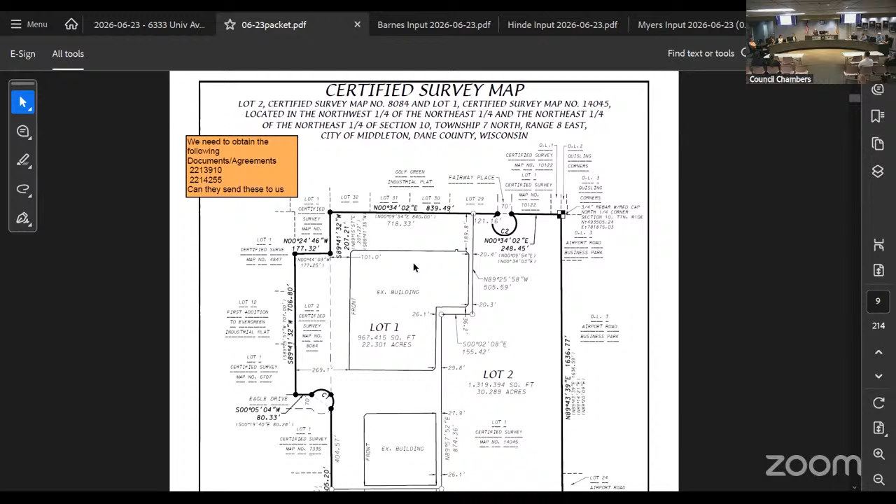So if there are no other corrections, I'll accept those minutes as drafted with that clarification. All right, we're moving on to the first agenda item. It's the certified survey map for the former American Girl campus at Fairway Place and Eagle Drive. And the recommendation from staff is approval of the CSM, subject to resolution of embedded staff comments.

This is Paulson. I'll move to accept the CSM subject to embedded staff comments. This is Shaw, I'll second that. All right, we have a motion and a second. Any comments?

Commissioner Paulson: What is the current zoning, and would these two new parcels conform to the existing zoning? Or is it a GDP? It's an SIP, and yes, it would conform.

Anything else? All right, seeing no other comments or questions, all those in favor of approving the CSM subject to resolution of embedded staff comments signify by saying aye. Aye. Any opposed? The ayes have it.

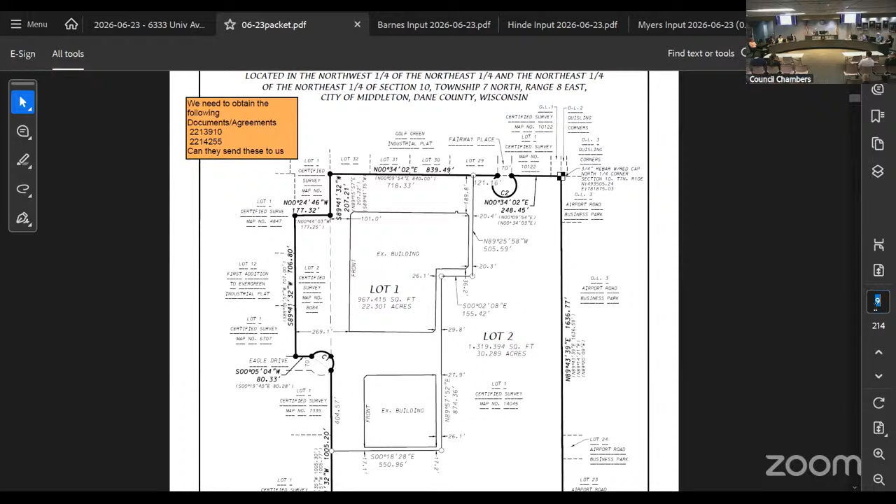All right, we're going to skip item 2 for now, just because our staff person is playing double duty. We'll go to item number 3, which is recommendation for determination of need for sidewalk installation along portion of north side of Lisa Lane. And the recommendation is that council approve resolution 2026-24 determining the need for sidewalk installation along the north side of Lisa Lane.

Is there a motion? This is Shaw. I'll make a motion to approve the resolution and recommend the common council move forward with installing sidewalks on the north side of Lisa Lane. Is there a second? This is Bruce, I'll second. All right, we have a motion and a second. Any discussion?

Commissioner Paulson: Can staff just, when we determine that there's a need, then that triggers a process different than what's under our purview? Yes. First of all, I just wanted to quickly introduce our planning intern, summer intern Michael McPhee, who wrote the staff report for this item. We were slammed last week, so we don't normally have a planning intern write a staff report, but when you have a rock star, he filled in for that.

So it determines the need, then at that point the common council will make that same determination and adopt the resolution. And then we reach out to the property owners and discuss with them whether they would prefer to hire their own contractor to do the work to meet city standards, or if they would like to go into the sidewalk replacement program that the city does annually. I think it might be too late for them to go into the replacement program this year because we have already bid and accepted it.

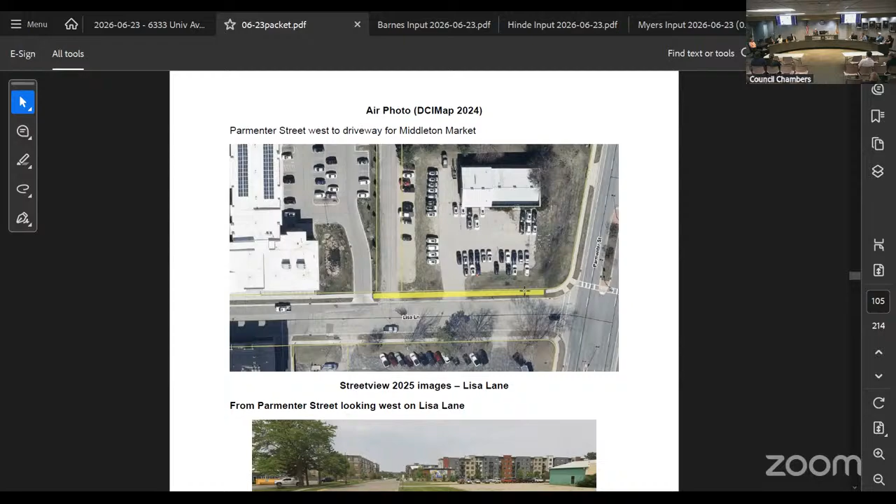One question I had is, do we need to or want to specify in the resolution what - I guess in theory, if it said along the north side of Lisa Lane, that's pretty complete, but since it says along a portion of it, I wonder if we should say from Parmenter Street to 7620 Lisa Lane to specify that in the resolved clause.

I would suggest that amendment. Actually, I'll move to amend the resolution to add that to the resolved clause. I'll second the amendment. All right.

Staff, do you see anything about that change that needs further discussion or tweaking? Okay, all those in favor, or any discussion from the commissioners? Nope. All those in favor of the amendment to add from Parmenter Street to 7620 Lisa Lane to the resolved clause in resolution 2026-24, signify by saying aye. Aye. Aye. Any opposed? All right, the ayes have it.

Any more discussion on the main motion as amended? If not, all those in favor of recommending that Common Council approve the amended resolution 2026-24, determining the need for sidewalk installation along the north side of Lisa Lane from Parmenter Street to 7620 Lisa Lane, signify by saying aye. Aye. Aye. Any opposed? The ayes have it.

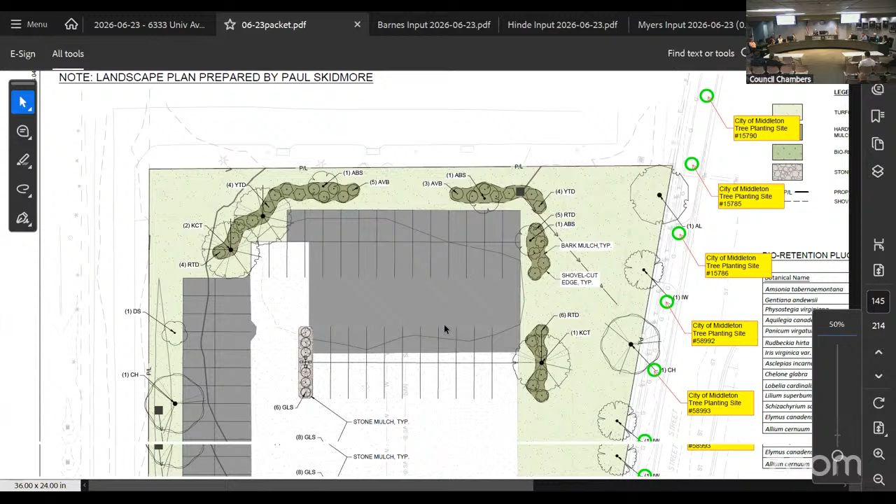Any discussion? Yeah, I wanted to add, I understand that we're not putting curb around the outside of the parking lot, and the city engineer was okay with that. I have some concern about the 2 tree islands or landscape islands that they have, just in terms of protecting the plantings that are there. They're not large areas, and it seems to me that if we want that landscaping to survive, we need some sort of protection around those 2 tree islands. You're talking about these ones at the end - these tree lines? Yeah, right.

I don't necessarily think that it has to be a concrete curb. It could be a railroad tie or some other mechanism.

Is it a matter of protecting them from cars, or is it a matter of getting groundwater towards the tree roots? Or both? What I see happening is the snow plows and cars driving over the edges of them. I'll probably be more concerned with the snow plows, considering who's going to be parking there, but yeah, I'd also be concerned about tree roots.

And is that one tree existing? I don't think so. Okay, feel free to come up. Please speak in the microphone and introduce yourself.

Good evening, Matt Dunn with Sullivan Design Build here on behalf of Simbrick. Yeah, I can confirm that tree does not currently exist there.

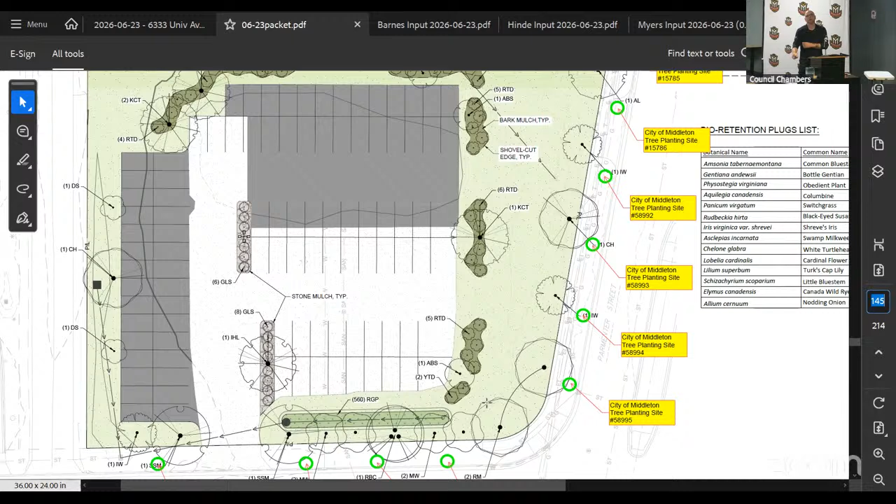I don't know that snow plowing would center in on those islands. To be effective for our customer to remove snow from the lot in the winter months, I imagine it would be pushed out away from the center of the lot.

I do appreciate everybody's work on this and the city engineer's response. Do you have any more questions I can answer? Any comments?

I guess this is more of a process question for staff. If our site plan requires someone to install landscaping and then the landscaping is killed because of snow plows, do we reinforce that requirement that they have to reinstall it, or is it just once and done, it's installed and it's check the box?

Yeah, so we don't do this often, checking up to see if they've planted everything, but there have been a couple instances where we've noticed pretty egregious plantings have died, and we've gone back to require them.

It also came to our attention because they were trying to make some improvements, so as part of that they came to Plan Commission and we required them to redo their landscaping. So it doesn't happen often, but usually it's when we get a complaint or something, we'll check in on that.

So that holds true also for the bioswale, if it turned out that wasn't enough for the drainage? Yeah, so the bioswale, they'll have to go through a stormwater management plan, reviewed by our engineering staff, and they'll inspect it and all of that as well. So once it's built out, we'll be sure it's inspected and we'll handle the flow of everything that goes in there.

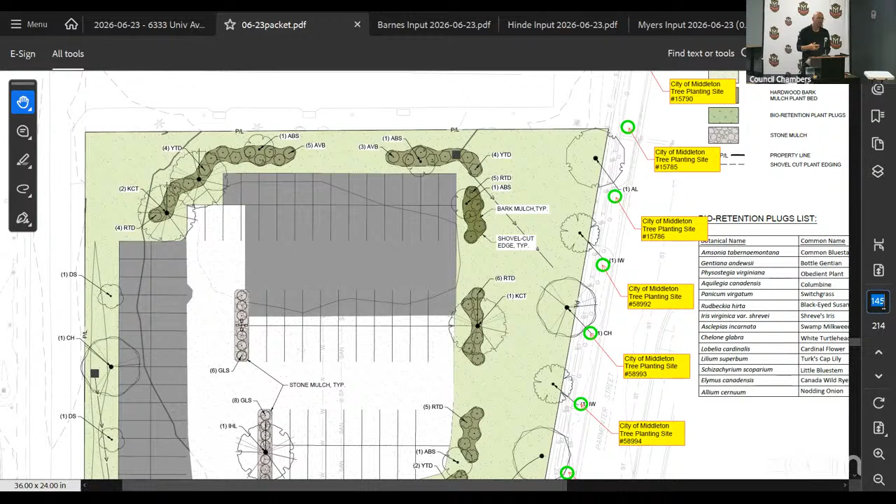Yeah, and there's a substantial investment from our customer in the landscaping itself, with the soil, the bioretention pond, and all the plantings. And our landscapers can be held to their warranty of workmanship and the plantings themselves.

Thank you. I wonder, since the landscaping requirement has come up twice in this meeting and we have a lot of people in attendance, would one of the staff like to explain what our requirement is with regard to native plants?

Sure, yeah. So very generally, we require certain landscaping depending on how much impervious surface there is, what is being built, if it's commercial next to single family or residential, we require extra landscaping in between to kind of buffer the two uses.

And then there are point requirements that get tabulated, they have to reach a certain amount of points to fit our city's landscaping requirements. At least 75% of those are also required to be native plantings, things found in Wisconsin or the northern US area. We have a list in our ordinance for at least a baseline of what is considered native plantings, and that also helps a lot with stormwater and all of those things as well.

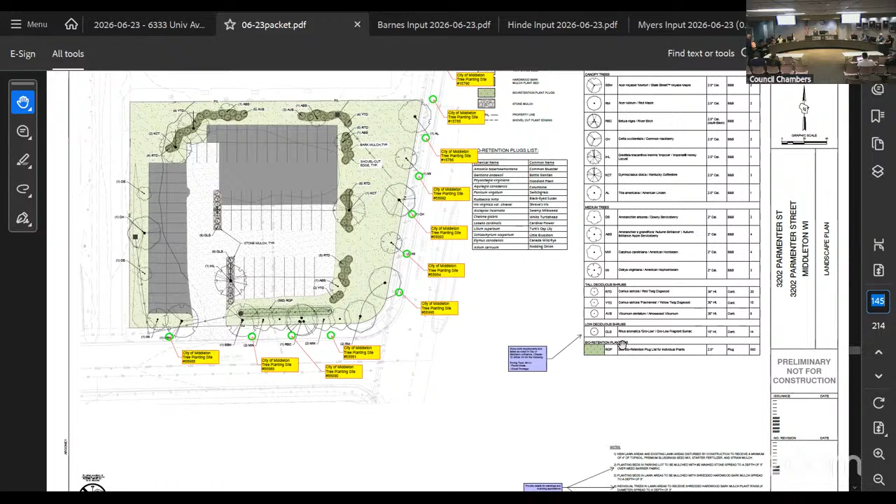Okay, so we have a motion and a second to approve the site plan review contingent upon these 7 contingencies showing on the screen. All those in favor of that motion signify by saying aye. Aye. Any opposed? The ayes have it.

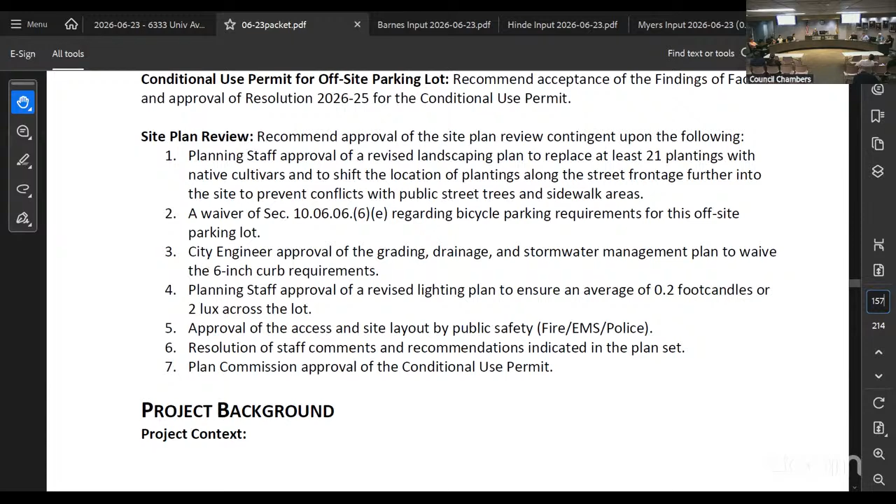Okay, moving on to item number 6, site plan review for multifamily residential development at 6333 University Avenue.

We have some public comment slips, so at the chair's discretion, I'm going to allow public comments tonight because I was unable to attend the neighborhood meeting. I did not know about it, but as it turns out, I would have been unavailable anyway because I had a wedding to attend.

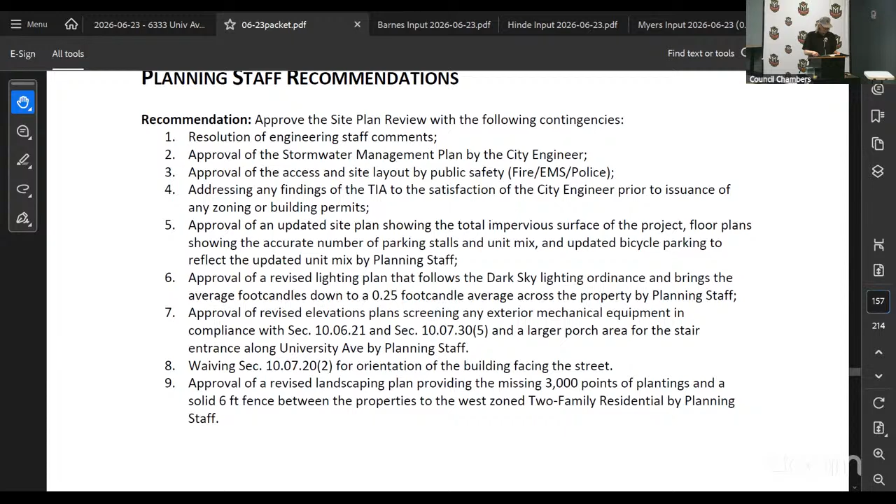I'm concerned that my property values will go down with this. If I try to sell my house, or decide I can't live there at this point because of this, I don't know if I'll be able to get as much money for my house. That concerns me.

I was under the understanding that planning concepts with apartment buildings were kind of to cluster them in certain places. Seems to me we've gone down a line here where we're just building buildings along University Avenue. There'll be kind of a canyon coming into Middleton from the Madison area. I'm concerned about turning Middleton into a commuter city where we just have people living here, but there's no increased jobs or amenities for these people living in these particular apartment buildings.

Very concerned about traffic pressures. I'm not sure how people will be getting onto University Avenue from this project and the project right across the street. Seems to me both of them will have times of the day where people are trying to make left-hand turns that will cause a great deal of congestion and maybe dangerous situations.

I don't know if there's any kind of green impact with this particular project. I don't know if there's going to be trees planted, any kind of park type areas for these people to spend time other than just in pavement and in their particular apartments.

Concerned about the increased lighting. One of the things I enjoy about my backyard so much is it's dark, and at night I can see stars, which I think will go away at that point. Concerned about the cost of mitigation to protect my backyard and keep it more private — assume that's going to cost me a fair amount of money.

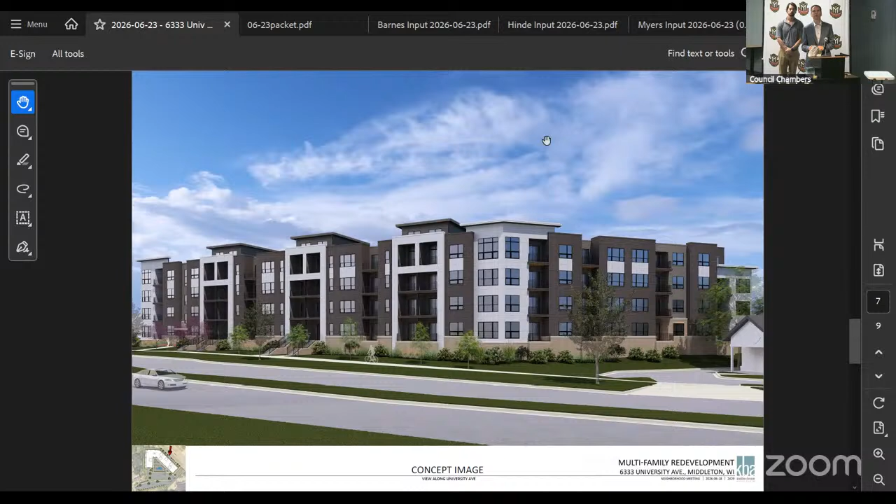This is a view along University Avenue. So this is as you're coming up University Avenue, what you would see for how the building presents. We do have the opportunity for the residents, for some of the residents that live along that area, to have direct access down to the sidewalk to really help engage the building to the street and to the pedestrian feel. And we do have a common staircase entry, which is on the left-hand side of this image shown here. And the building does return back.

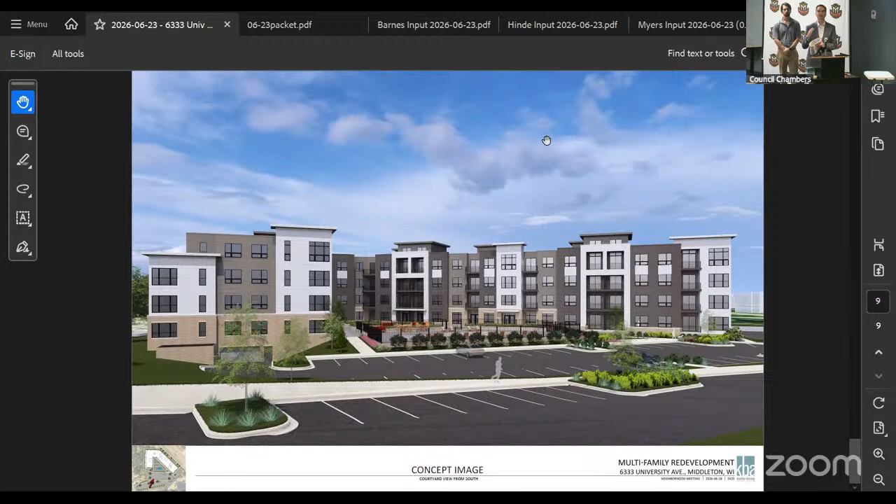And this is a view inside the courtyard area as you're coming around to that parking area, which will then lead you down. And the next slide will show you how you can access down into the underground parking, again, utilizing the topography of the site. And then we will do landscaping around that outdoor plaza area as well.

And then Colin can speak to the overall timeline of the project. So currently we have leases in place for most of the units in that building. The last lease goes through June of 2031. We've been in contact with the commercial tenants about their current leases. We're open to extending through that 2031 timeline, which our last lease is through. With it being later in the season, we may be able to break ground late 2031 or early 2032. We are stepping the building back about 10 feet from its current location.

One of the topics brought up in the conditions was landscaping. I talked with our landscape architects today about increased plant points. We're going to utilize, like in our previous buildings, a lot of planters along the plaza area. That'll add greenery to that center area, as well as landscaping around the new driveway up to Elmwood Street.

Are there any other questions on this presentation or current leases or anything like that? I'll go to the commissioners.

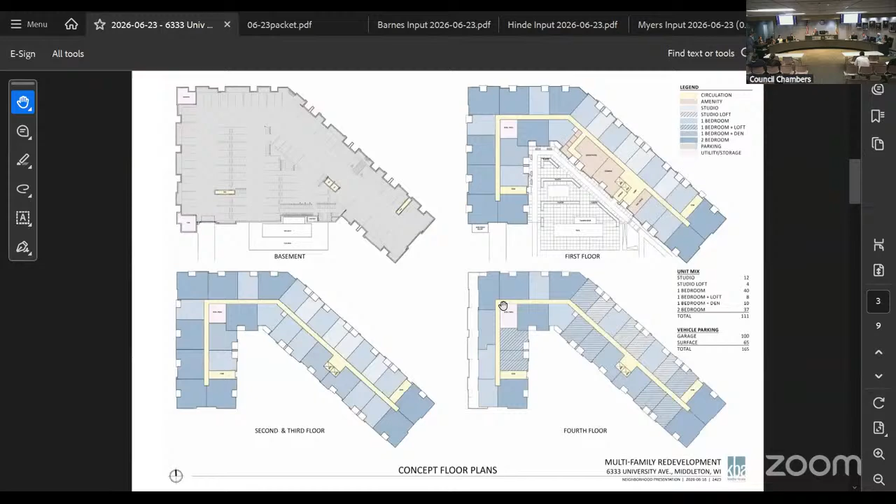Are there any recreational spaces on the roof, like a sun deck or green space? On the very top of the building, no, but the units facing west have an opportunity where their balcony is the roof surface they can step out onto, because we set the building back an additional 10 to 12 feet.

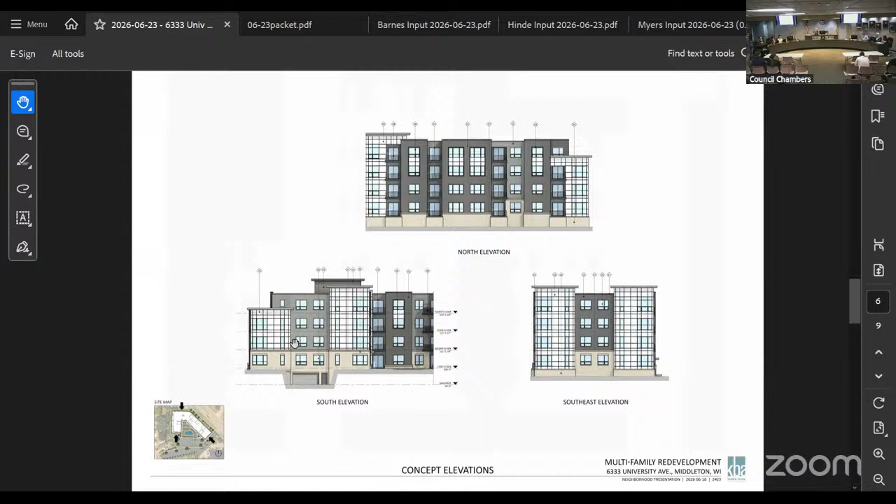When you were doing the design, the pool seems to face the parking and more parking. If I were living there, I'd like to be a little more secluded using a pool. It seems like you have an opportunity to reorient the building with the western leg blocking some of the pool and giving relief to the neighbors, so they wouldn't have a building against them but rather a pool, which I think they'd appreciate. I wouldn't want a 4-story building even with a setback right against my lot line, so I understand their concerns. Maybe this could have been looked at differently. I don't know what the constraints were when designing this.

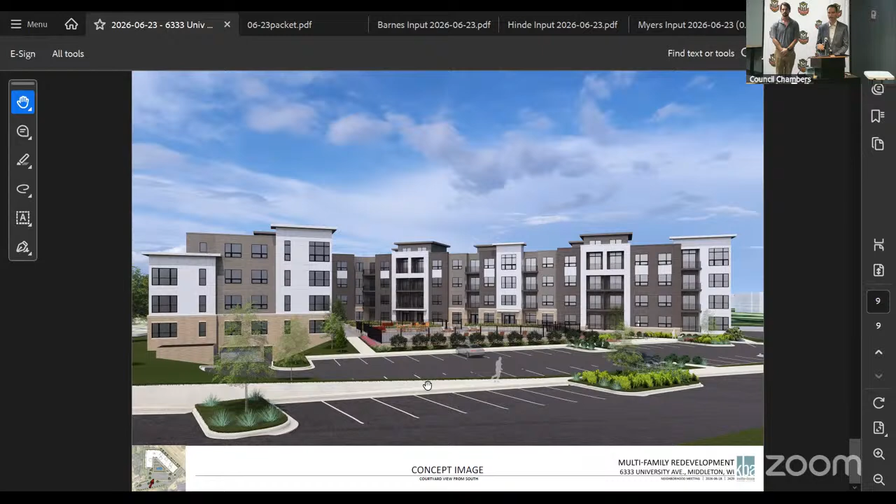Well, we studied it in various scenarios. Our main focus was to help ensure the pool would have ample sunlight. We do intend to do extensive landscaping along the southern edge to provide that buffer. It's elevated above the existing grade as well, since the grade drops down to get into the basement level, so it'll be elevated above parking, meaning there won't be direct headlights. There will be landscaping screening as well. This proved to be the most efficient layout for placement of the building and the amenities we wanted to provide for residents.

Commissioner Paulson: interrupt me anytime, I probably have 17 questions. While we're talking about the pool, do we have a noise or hours of operation ordinance, given its proximity to residential properties? Yeah, I believe we have a nuisance ordinance generally across the city, and things like construction and noise, amplified sound, starting at 7 AM and ending at I believe 10 PM.

Could we? I was just seeing whether we needed to put a condition in the plan about the hours.

I want to ask more about the step back on the west side. Daphne, can you remind us what our ordinance says when a commercial district abuts residential? Yeah, for any zoning district, like a commercial district abutting a residential district, we only allow up to 3 stories at that setback, and anything higher needs to be stepped back. So what you see on screen, the building is pushed back further, at basically a 45-degree angle. So however tall the building is, it has to be pushed back that same amount — if it's 12 feet taller, it has to be pushed back 12 feet.

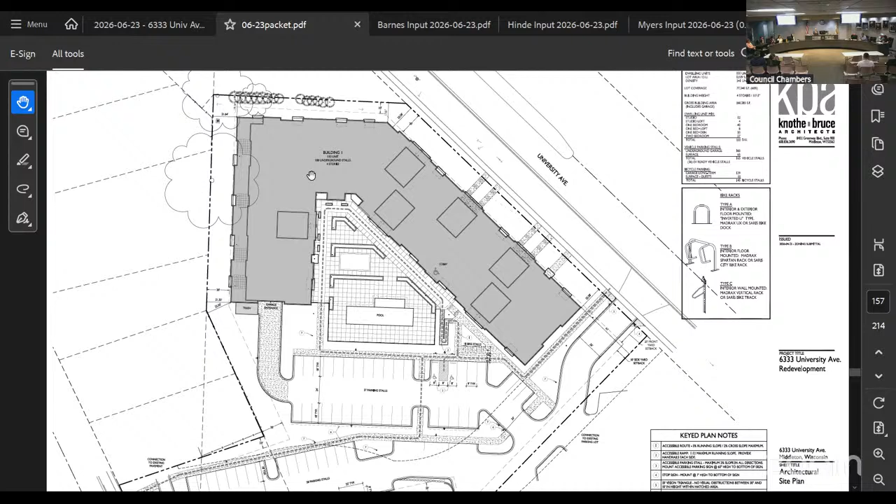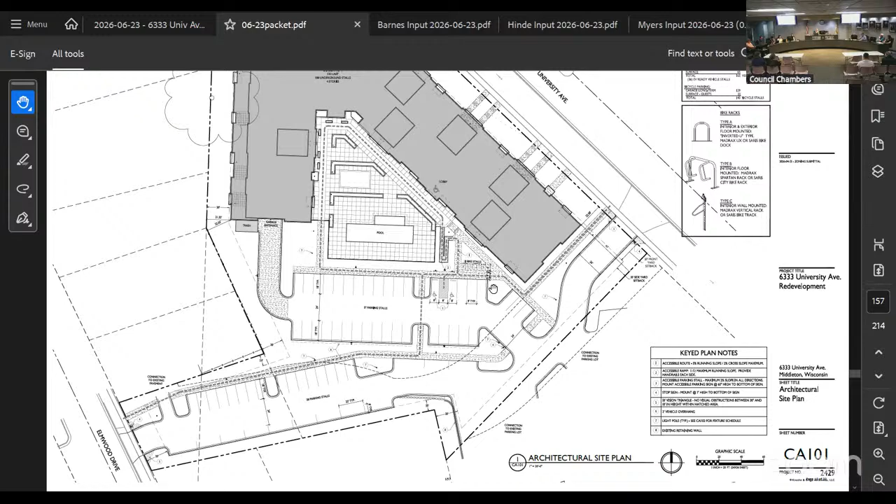Commissioner Paulson, relative to traffic, the cut through on the south side currently exists, but that's not a street, that's just a private drive. People drive through there anyway and the owners are okay with it. So relative to what some of us, and some of the neighbors, were thinking, if you took that west end chunk, the part you know I'm talking about, and flipped it over next to Wolf Kubley and blocked off that access, then you could retain the northwest entrance. Would that negatively impact the cut through on the south side?

I'm sure you looked at it, did you even do a skim? So that the building would start, I don't know how much you'd have to cut off and then put along, where Daphne's moving the finger.

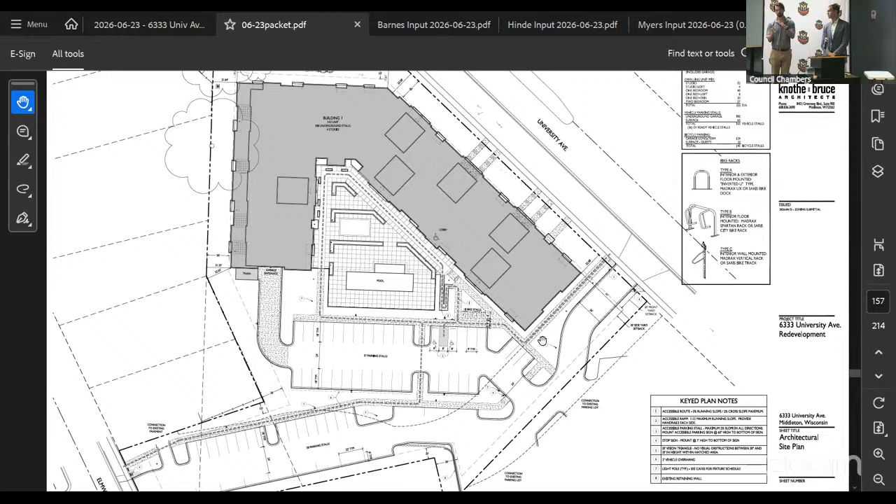So right there, we actually have an easement with Wolf Kubley for that area. That's a shared parking lot, shared drive, subject to an easement. Just to clarify, is the driveway shared or the parking lot shared? The parking lot - there's an easement between us and the Wolf Kubley property owners for that pull-in area, kind of that whole area is split between the two of us.

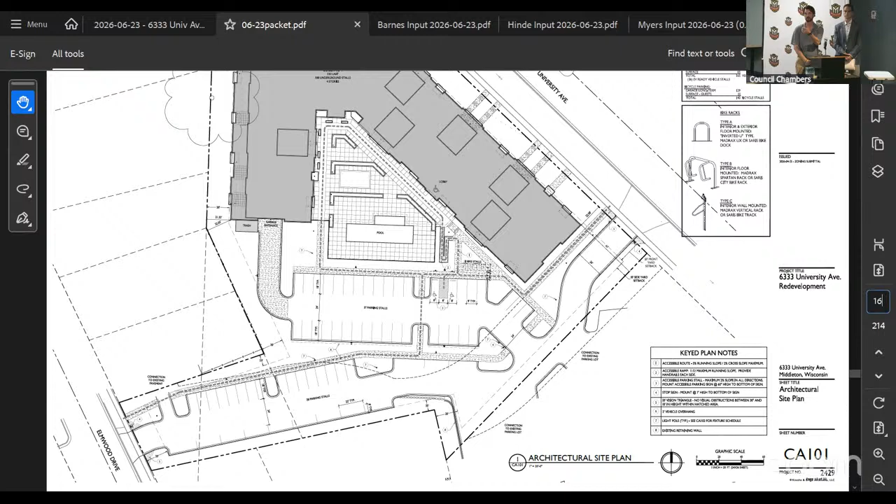Yeah, right there, that big. But the new building would still be on top of that though, right? No, no, no. Oh okay, I believe it was in the wrong spot - oh okay, I accidentally dragged it, okay, but that's another thing that runs through that property, that easement area. The reason I ask is, I understand the neighbor's concern about why wasn't the building flipped the other way, and it's both the infrastructure and the easement that really makes it so you can't do it. Exactly. Well, I mean you could, it would be a challenge.

Go ahead, Ray. Mr. Burrow, if you could - we're listening, we're hearing some comments from the neighbors regarding reorientation of that, what I'll just call the most western leg.

Is there an opportunity for all or a portion of that leg to be reoriented or relocated to the southeast section of the site and still get access to the parking? Maybe the pool becomes, instead of just directly south, a little bit southwest oriented, and the courtyard would orient more southwest. Do you see that as an opportunity at all?

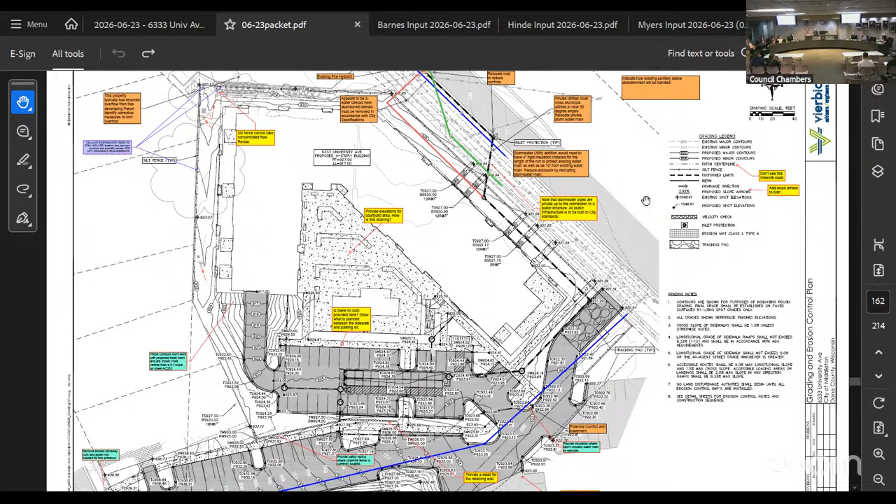Relative to the retail question, again, our ordinance cannot require it, right? Because that was a decision we went over and over during the comprehensive plan and the rezoning, whether to require mid-block retail, particularly on this mixed-use avenue zoning district, just because of all the cut-in, cut-out traffic access. I think the city's policy was not to require it mid-block, based on the experience of the city of Madison, which has a lot of mid-block first floor commercial sitting empty that was required, so it's not really as much a walkable thing on University Avenue, it's really more a drivable arterial road.

Even down University into Madison you can see there's still a lot of empty retail. It's a little more difficult for retail to survive in areas where there isn't, and the reason the strip mall works is because there are still multiple tenants. So if there's only maybe one tenant in a mid-block, it's still pretty difficult to be viable.

So do we know where those tenants are gonna go? Like you said, you've got leases through 2031, so this isn't gonna start till late 2031, early 2032. Where are those businesses going to go?

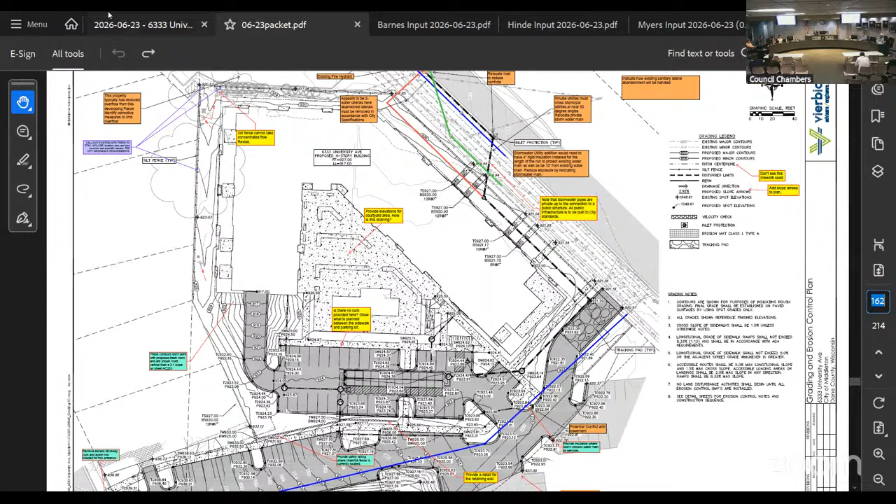Commissioner Paulson? Daphne, in the staff comments, there was some mention of a crosswalk or a crossway at, I forget the name of the street just immediately south. Do you remember those comments in the staff report? Are you talking about... let me pull it up. Gateway, yeah, the one across where 6300 is along Gateway.

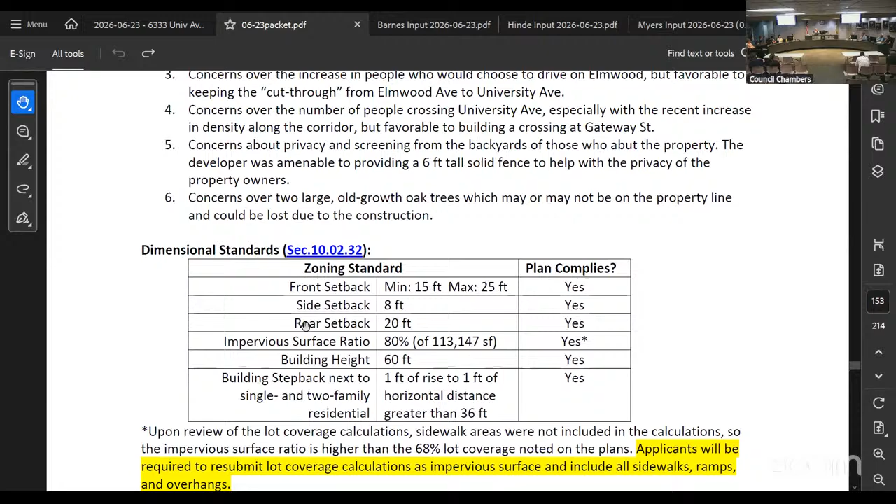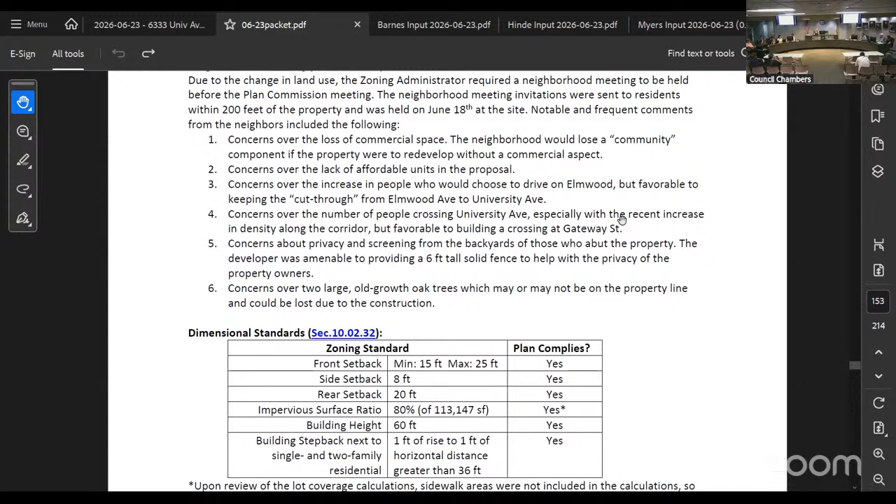The staff comments identified a need for something there, but there's already a painted crosswalk, right? I'm not sure if there's one favorable to building a crossing at Gateway Street. There's a painted crosswalk on the south, over by the Wolf Coop. And again, what we learned from the Parmenter discussion is we wouldn't really think it's safe for a mid-block crosswalk on a high capacity arterial like University Avenue.

University Avenue is definitely one we're probably going to be looking at more intensely because we have a lot of these mid-block crossings without any signals or even RRFBs. That is definitely something our Public Works Department is going to be working on in the next couple years. I can't say if this project will trigger anything, but as part of their traffic impact, they will be required to mitigate.

It's like the left in, left out, or right in, right out kind of situations, they will need to be able to address those. Because you could imagine that with this many units, and possibly others given the corridor plan and the zoning, and then the one across the street, it might warrant an additional stoplight somewhere along the way.

So, okay, I think Randy has some comments. Go ahead, Commissioner Bruce. Well, first of all, I just wanted to offer my support for redevelopment of the site. It is a neighborhood resource now as a commercial facility, but its redevelopment really sits quite well with our long-term comprehensive plan. We should be excited about the ability to provide additional housing along this corridor where we can use, at least in the future, rapid transit. So I'm very supportive of the use.

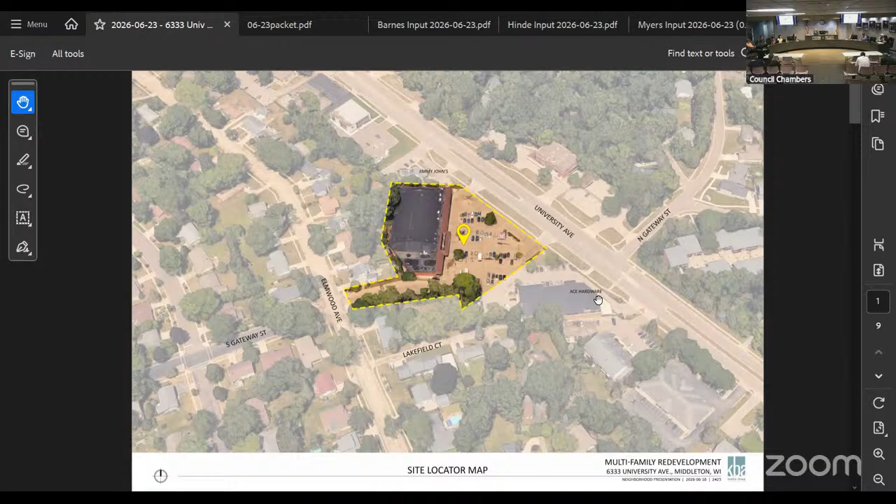When I first looked at the site plan, I was not struck with that concern about the proximity to the western, the west property line, because of the building step back. That fits with both the University Avenue corridor plan and the zoning. I'm not sure we can even require a change there if it meets our zoning. I would maybe ask the developer and design team to take a look and see if there's an option that would help mitigate some of the impact of the building on that site, but I'm not sure what we can do to require it if it meets all our zoning requirements.

The couple of comments I had about the design: one is the length of the building along University Avenue. We have a 250-foot limit. If you go back to that site plan, Daphne, I think in the staff report you talk about 240 feet, tracing along with the cursor. My concern is from University Avenue, if you're looking at the building you see that facade, but you also see this facade as it starts to bend back, so it would exceed the 250 feet if you were to look at it all in one plane.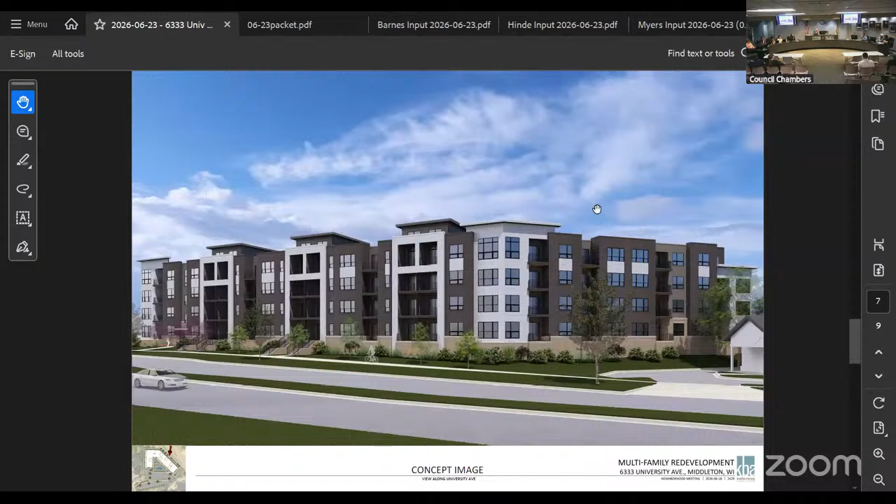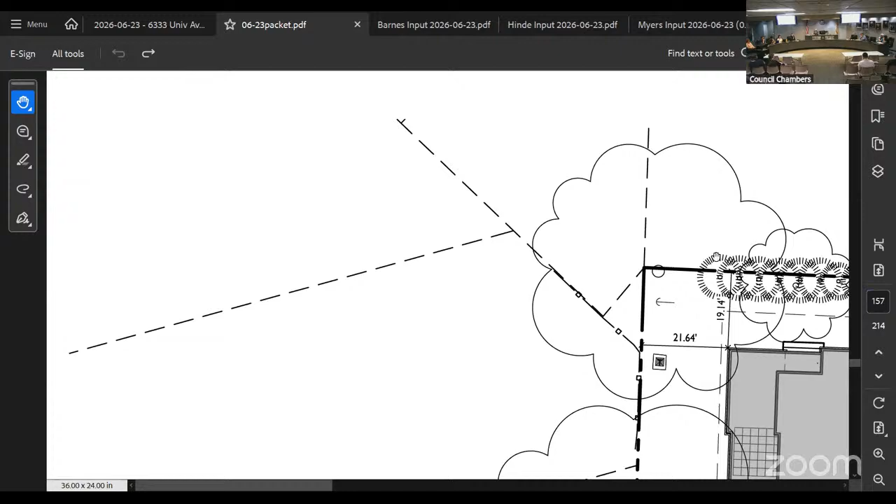I also think we ought to require a tree protection plan for the trees along the neighboring properties, on the west side and even the south side, where we've got the neighbor concerned about the pavement. I don't think if the pavement stays basically where it's at there's going to be much impact or concern there, but I think a tree protection plan could address what needs to happen there as well.

The last comment I'd make, which Daphne had put in her report, is about the stairway exit onto University Avenue having a more significant entry feature — a porch or some other element. If we can get that to read as a more primary entrance, and include electronic access and security access, so that people walking across the street — there could be some pedestrian traffic in this location given the number of housing units right there. Rather than make them walk all the way around the building, it would be good to have a pedestrian access point there.

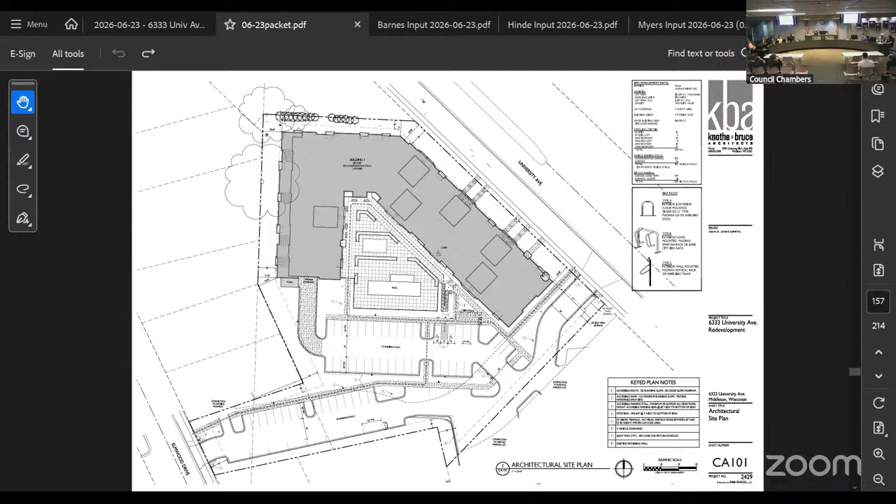Can I just clarify? Are those stairway entrances only to that specific unit, not to the common area of the building, or are they? The one to the south, right where her mouse is, is a public access emergency egress stair which could serve as a public access entry point. It's down at mid-level between the basement and first floor — we could have an opportunity for entry there. The four to the north are directly into private patios.

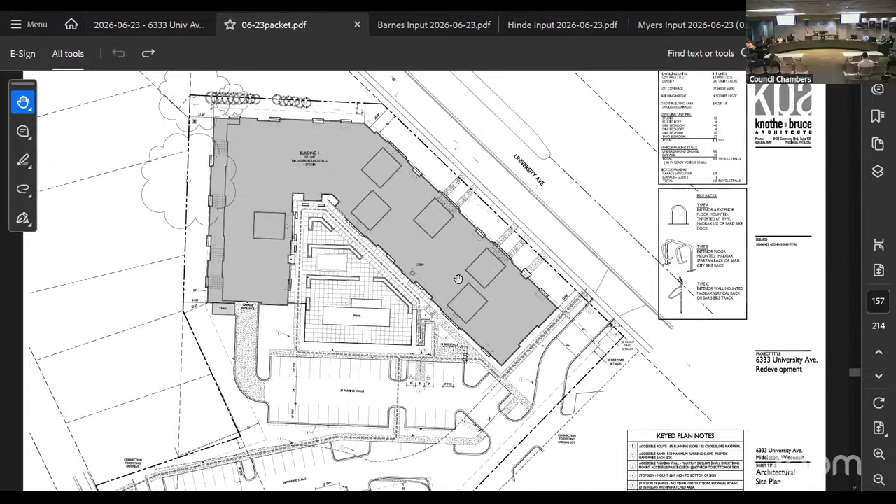So there's no common hallway on the first floor you could connect to? Well, there is — could you get to the first floor plan? Kevin, can you describe how that would work? Just above that two-bedroom unit, there's an exit stair with a clear path to the corridor inside the building. So if anybody were buzzed in at that entry point, they could come into the building and get access to the interior of the entire building.

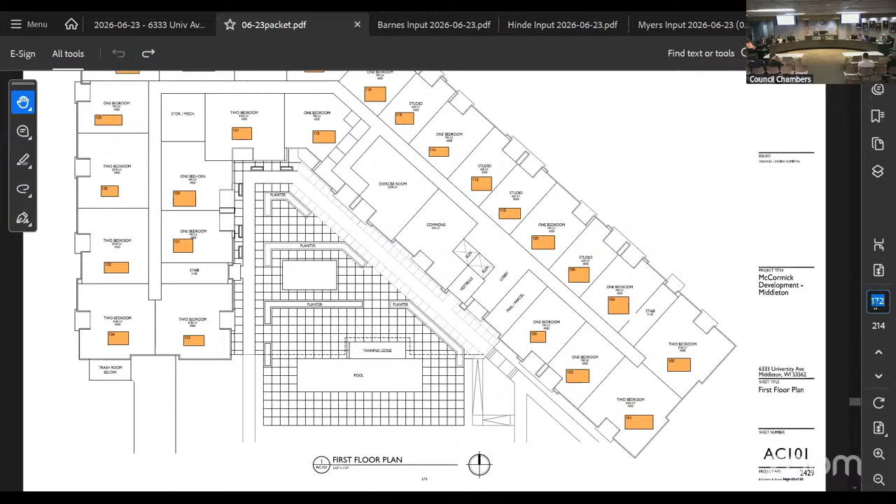Otherwise the entrance is by the... yeah, correct. And the corridor design guidelines want the entrances toward the street, right? So Randy, you're suggesting changing the staff comment — is there a staff comment on this particular point? There was a staff comment. Okay, Daphne, can you help us out there?

Yeah, so that's number 7. Larger porch area for the stair. I think the only thing I would do is add that the larger porch area and entryway read as a primary entrance.

Do you want to say consistent with the University Avenue plan? Yeah, consistent with the plan, University Avenue plan, and to include electronic and security access.

Would that need to be ADA as well? No, it does not. Okay, what about signage right there to make it look more like a front entrance? Could we do a monument sign there to tie that in? Yeah, you're allowed to have one monument sign on the property. You could also have on-building signage as well.

Yeah, because otherwise the architecture that says this is a stairway is like, oh, no it's not really, it's just to a private entrance, it's not to the building itself. Yeah, that's a good call, Commissioner Bruce.

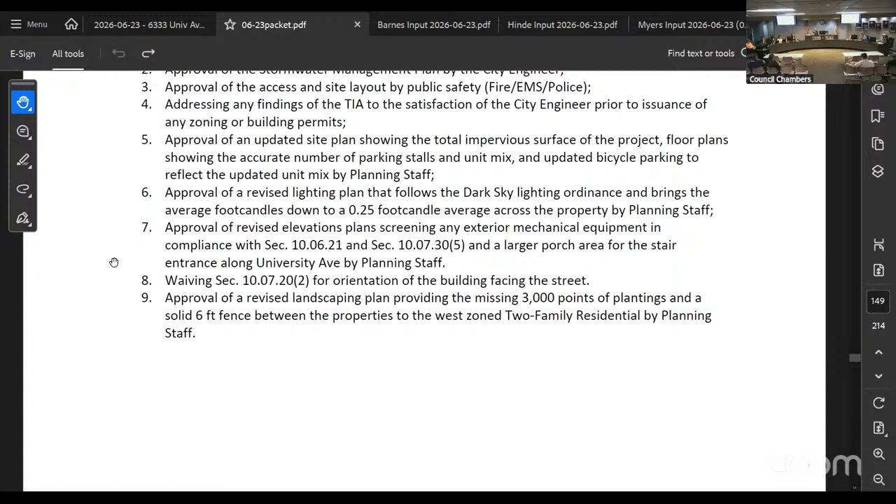And the 6 foot fence, I'm looking at point 9, who maintains that over time? A 6 foot wood fence isn't... We've got this on some of our other buildings that would be on our side. We would do a long-lasting, more of a Trex material fencing, and we would be able to maintain that with our landscaping. So you would maintain the landscaping on your side.

I'm thinking about the neighbors where all of a sudden it's just a 6-foot fence and now they're kind of boxed in. The point of the 6-foot fence is to offer them privacy. Is there any other more attractive green space option so they don't just feel like a giant wall went up behind them?

Are you saying like put trees? Like arborvitae or some bush? On our side, correct? Yeah, I'm just thinking that if it was my house and all of a sudden I had all this open space and now I've got a 6-foot wall, and behind that wall is a bunch of apartments, that might not be the best view. I think I would rather have a row of plants myself.

I don't know if that's true for the owners, but was anything else discussed on how to provide some privacy? If you don't reorient it, if there has to be a building there, is there anything we can do to soften it, make it more attractive, more park-like? That was another question - are there any green spaces for people to hang out?

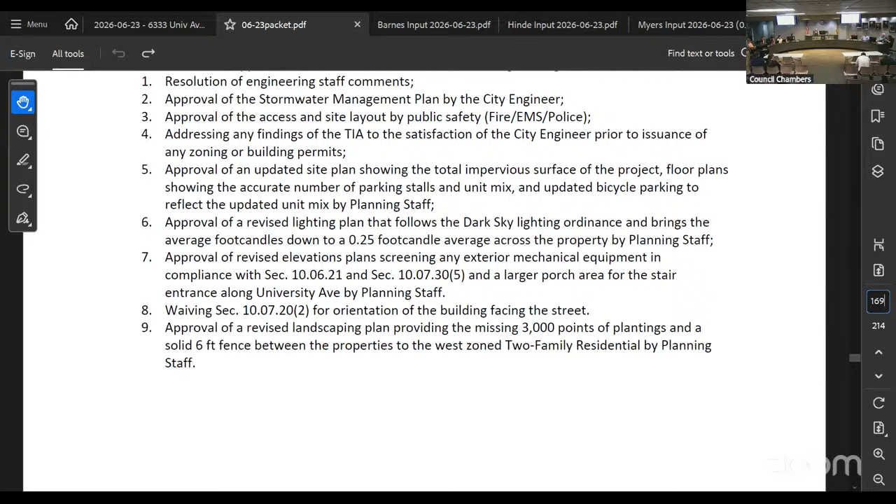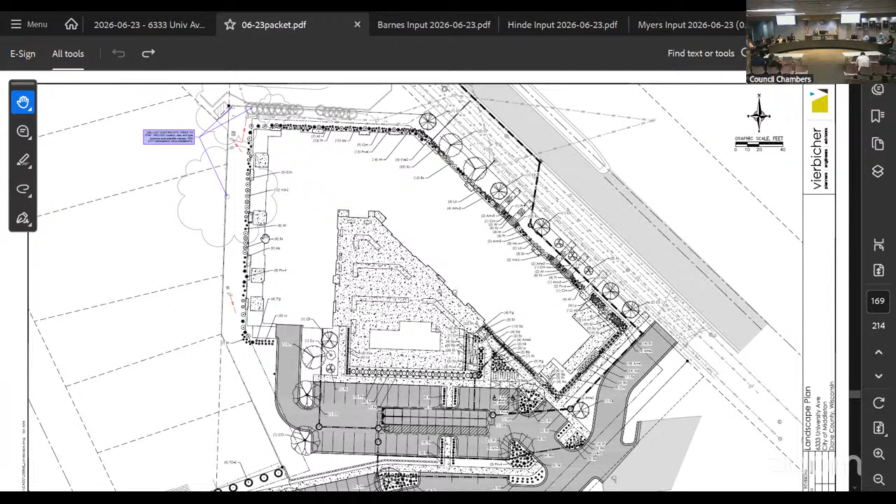If there was 20 feet there, what's happening with that 20 feet between the property and the building? You mean on the west side? Yeah, the 20 feet between the fence and the building. So if you put up a fence, now you just have an alleyway. So the fence came from our neighborhood discussion.

We can put arborvitaes back there, more landscaping on our side so that we can maintain them. The fence was brought up from that neighborhood meeting, and that was kind of what we had talked about there.

So part of the landscaping point, point 9, was they are missing quite a bit of landscaping, and part of it is a requirement as part of the buffer yard. We also have a requirement for a 44-inch picket fence between Mixed Use Avenue and residential, and so they've decided to go with a 6-foot privacy fence after meeting with some of those neighbors.

And so that 20 feet is considered a buffer yard. So it's generally not considered something residents are supposed to be regularly accessing for recreation, because it should be heavily planted. Yes, they would be required additional plantings in that area. I believe they have some balcony spaces back there, but nothing for people walking around. I'm not sure if they would have any - because it's also parking, there aren't any first floor patios or anything either, it's kind of like a brick wall back there.

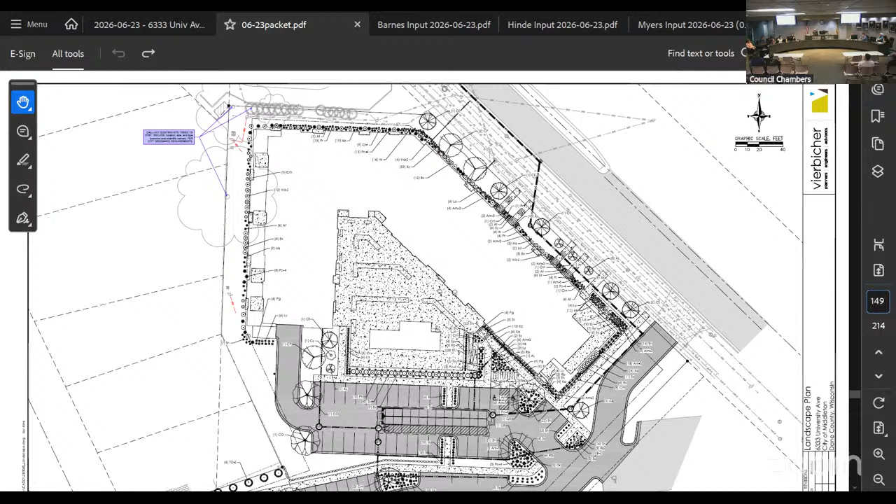If it goes to develop in 2031 and the tree has died naturally, it's kind of a moot point anyway. So I would suggest that we request the tree protection plan address the western property line and the southern property line at the time of construction.

Someone typing that up. Yes, I have that. I'm not seeing it. I can share my screen. Oh, okay.

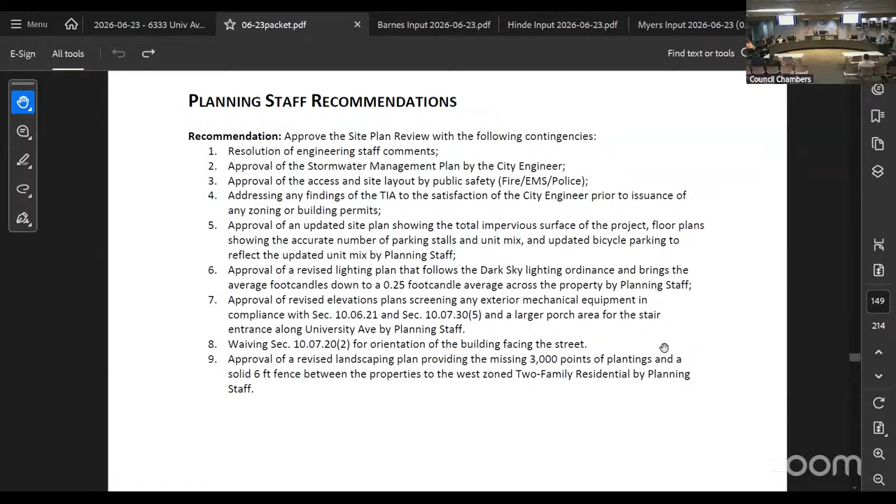I'll just make a note, when it comes to signage, while you're obviously allowed to have a monument sign, I would caution placement on that, both for vehicle visibility and pedestrian visibility. We already addressed the traffic concerns, but just thinking of an apartment in my neighborhood, that monument sign definitely poses visibility issues.

And what do we do about the concern for traffic on Elmwood? Should that be addressed? That would be commented on in the traffic impact analysis. But to the extent that their development would impose a degradation of service on Elmwood Avenue, they would be required to mitigate that. Is that the right way to say it? That's correct.

Do you know if they're required to have that connection? They're not required to have that connection. Typically for every property, we only allow one access point, and so if they want an additional one, that's why they have to go through a traffic impact analysis. It's also changing again from commercial to residential, so the second access point and the change of use created the need for the TIA. But if it was closed off, there wouldn't be any traffic impact on Elmwood Avenue—it would all be in and out at University.

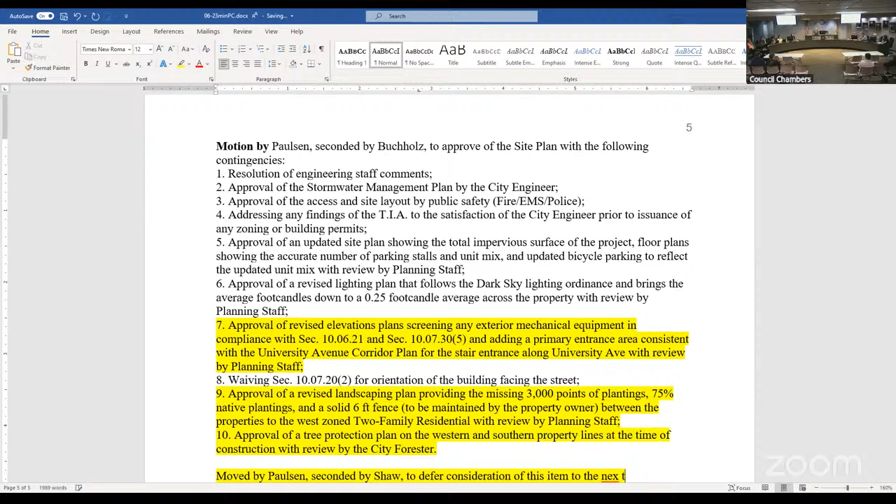I'll second that. All right, so we have a motion made. Actually, we should first—I'll make a motion to amend the motion by adding condition number 7 and 9 as typed here by staff. Because I don't think we amended the motion, did we? There were changes made to the language in 7, 9, and then 10 is entirely new.

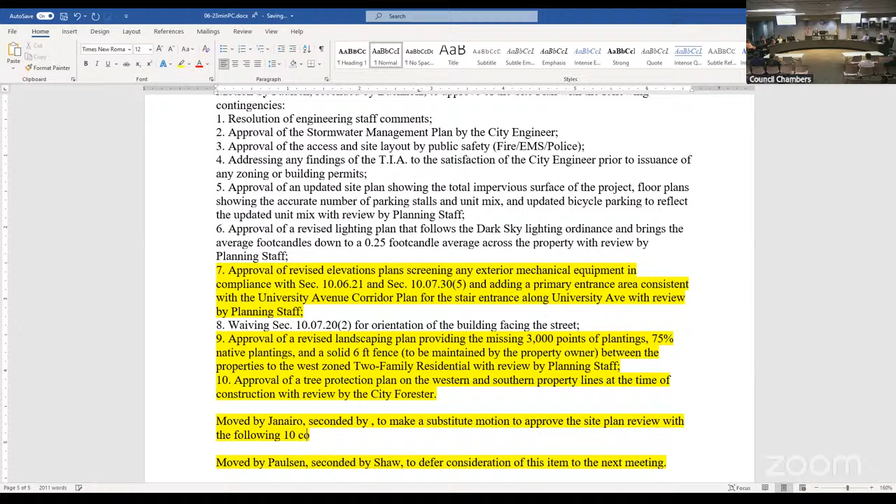Okay, I will make a substitute motion since you already made a motion and had it seconded. I'm going to make a substitute motion to—hold on, I got too many pages—here we go—to approve the site plan review with the following 10 contingencies, including the ones added during this discussion tonight.

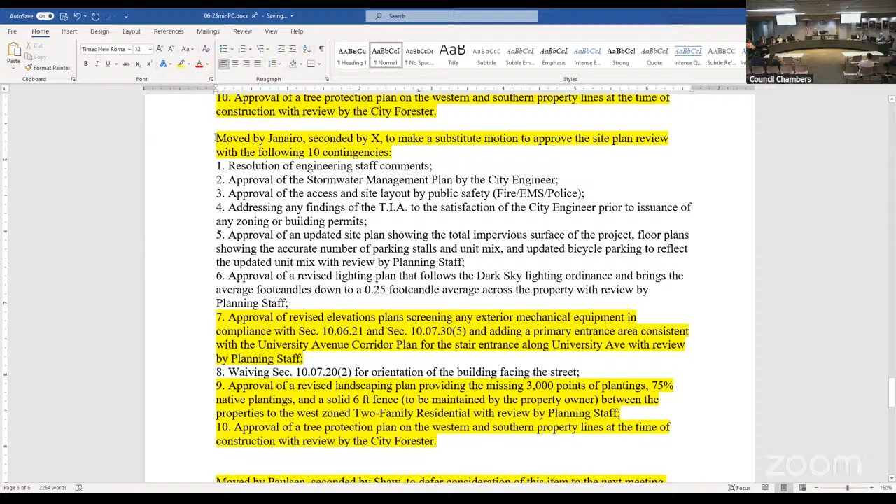So again, this motion is just to codify all the things we talked about. So the amendment is to approve—or to, yeah, I'm trying to figure out how to do this. Didn't get a second anyway. So my amendment, my motion is to add or replace the 7 original contingencies, and the 9 original, with the 10. Looks like we added more—we're adding this and talking about it. Yeah, so these are the new contingencies. Just that we're approving these—just changing the wording, adding a few more, and changing the word.

So this motion is to amend the main motion, to incorporate the contingencies that we've discussed. I'll second that. All right, so now we have a motion and a second.

This is amending the contingencies. Okay, Morrow and Shaw. All those in favor of amending the contingencies signify by saying aye. Aye. Any opposed? Guys have it.

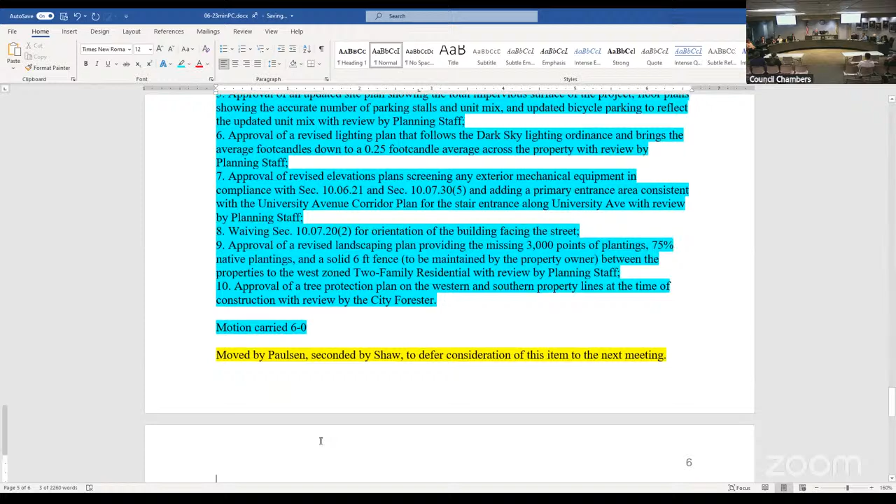Now we go back to the motion by Paulsen, seconded by Shaw, to defer consideration of this item. No, let's just say to defer consideration. And then the developer will respond to some of the comments and perhaps even show an alternate site plan that might address some of those concerns, and hopefully we get some lead time so that neighbors know about it and can plan for it.

Do we know when the TIA might come through? I'm not sure on that. It usually takes them at least a month to review, and I believe it just went through Public Works Committee for the contract, the scope of services. And it can take them up to 60 days to do the study.

I understand that it may be that the applicant comes back with primarily the same site plan, but I think having the opportunity to listen to those comments, see if they can be addressed in some fashion, would be helpful.

Okay, so we have a motion and a second to defer consideration of this item. Signify by saying aye. Aye. Any opposed? You guys have it.

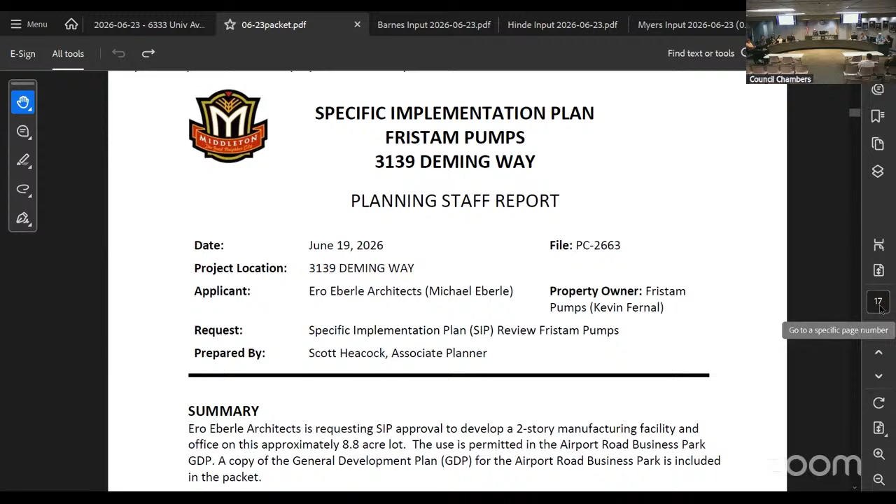Any discussion? Looks good. This is probably outside the purview of us, but you've got enhanced asphalt around the loading dock, but the loading dock itself is 6 inches of concrete, I believe, with a 6-inch base. We require 7 inches in our driveways for cars and trucks to pull over. I would think you would want more, but that's your decision. I didn't even notice that.

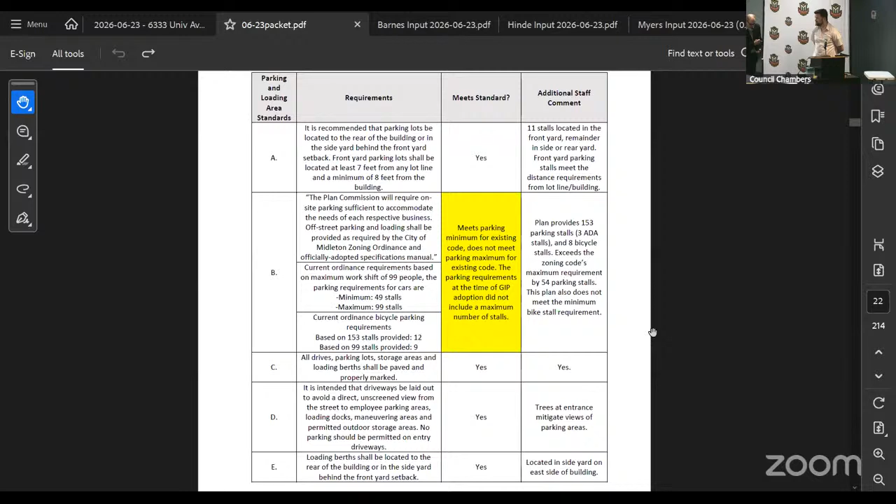And do we apply newly changed parking requirements with the maximum retroactively to a GDP like this? I would say typically no, since the GDP did mention they had parking requirements in their GDP, so we would follow that first.

So if you combine first and second shift, is that about the right number of parking stalls for the combined totals? It's like 70 in the first shift and 40 in the second shift. Okay, about 110, yeah.

And then there's parking there for future growth. So we're kind of setting up the whole site for that future expansion too. Right now we're considering whether we pull that edge back or not.

I was also wondering about access points. There didn't seem to be a lot of doorways outside of around the dock and around the front. These plans are in progress, but there's gonna be like 7 or 8 doors in and out of that space. I don't know much about your operation, but I know enough about other ones where there's a need to get out of the building very quickly, so I was concerned.

I wanted to comment on the architecture. I thought it was very attractive. And for what it is, it's very nice, fantastic actually, quite nice.

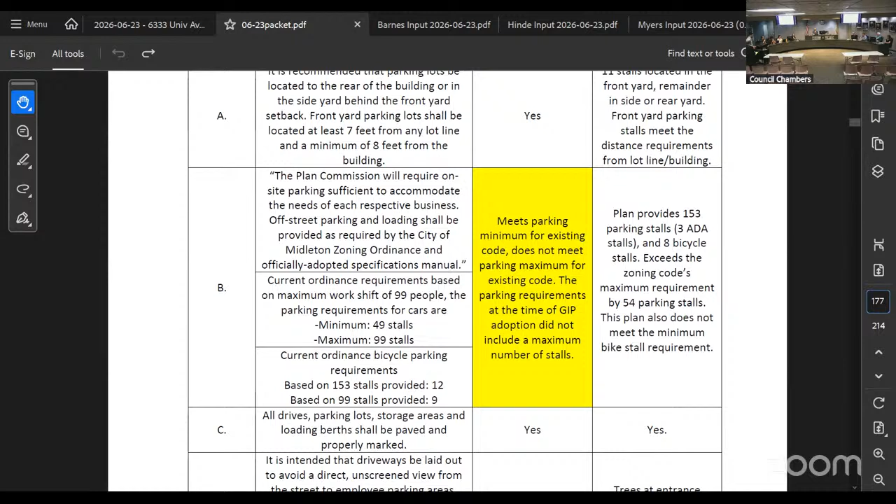I wanted to comment on the economic development. We've always been concerned, going back to our comprehensive plan, to preserve industrial space for actual manufacturing, not just for warehousing or dance studios or more retail uses. So this is a nice addition to that business park.

I agree, we agree, thank you. I agree, and it'll pump up everybody in excitement, no? Oh, I knew we had to get one in there, never mind.

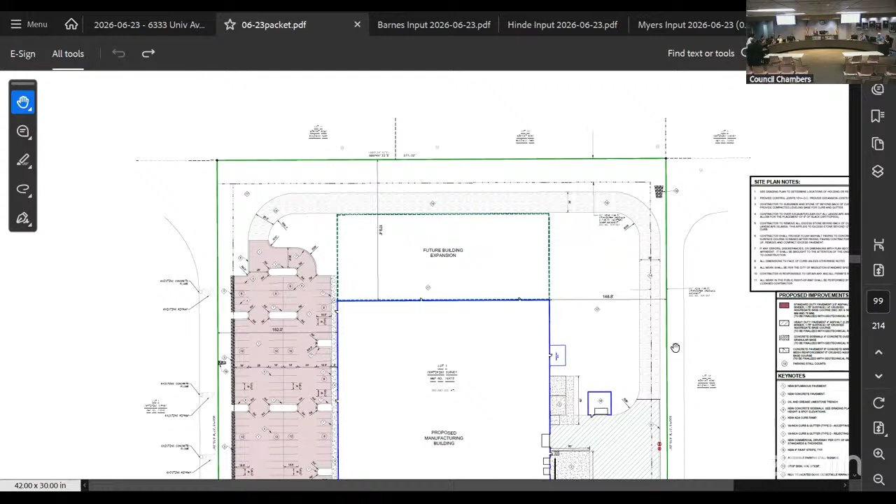And I do appreciate the staff for flagging not to take down our tree for a driveway. Is that, you're able to move that? Which tree was that? It's page 47 of the packet, C100. Oh, sure, there it is. Yeah, we can adjust the driveway to aim right at that, and make it work so we can keep the tree.

All right, any further discussion, questions, comments?

I forgot to introduce myself. For the record, I'm Doug Pal from Eberly Architects. And that's Mike Eberly. So thanks, thank you for your patience as we got through this. No worries, really appreciate it. Where did everybody go?

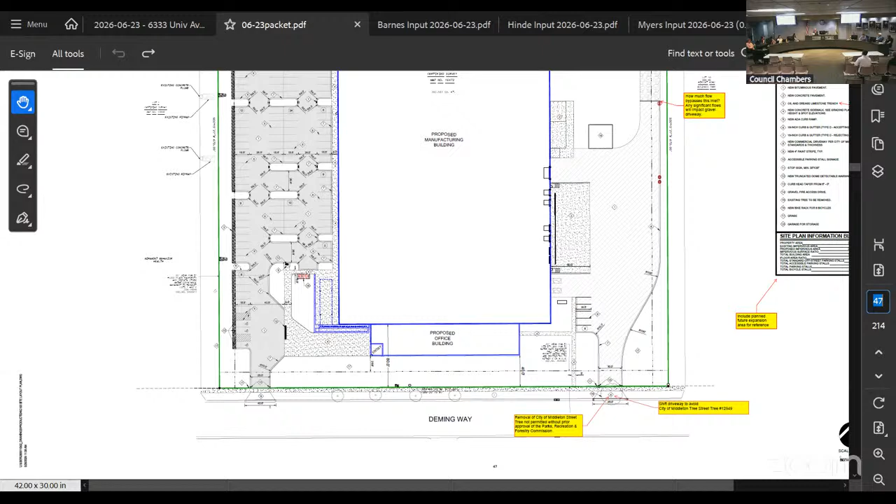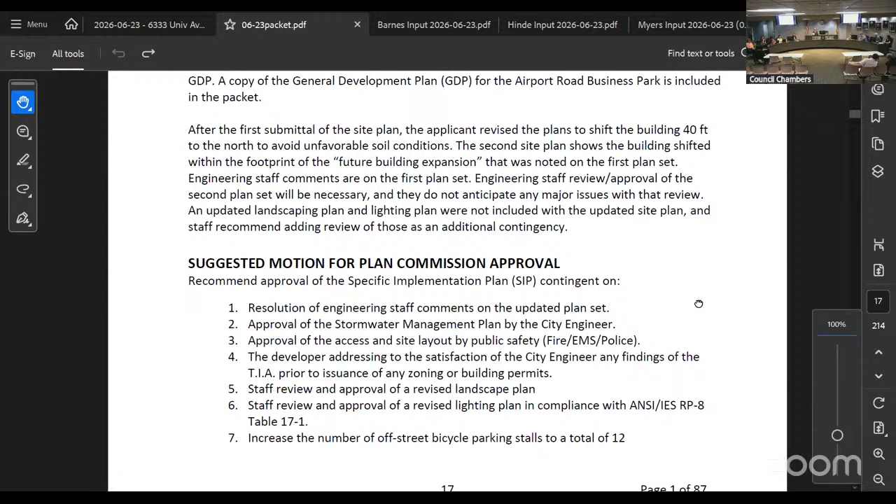Okay, all right, so we have a motion by Shaw, seconded by Summers, to recommend approval of the SIP for Friston Pumps USA Manufacturing and Office Facility at 3139 Deming Way, with the 7 contingencies showing on the screen. All those in favor signify by saying aye. Aye. Any opposed? The ayes have it.

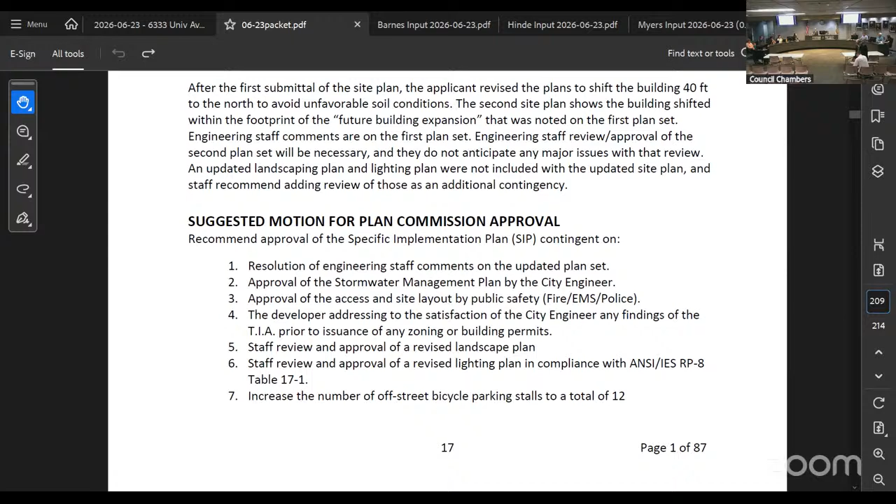All right, moving on, we did item 6. Item 7 has been pulled, correct? That's correct, they asked it be withdrawn. We were looking forward to debating that one for another hour, but I was kidding, I had a page and a half.

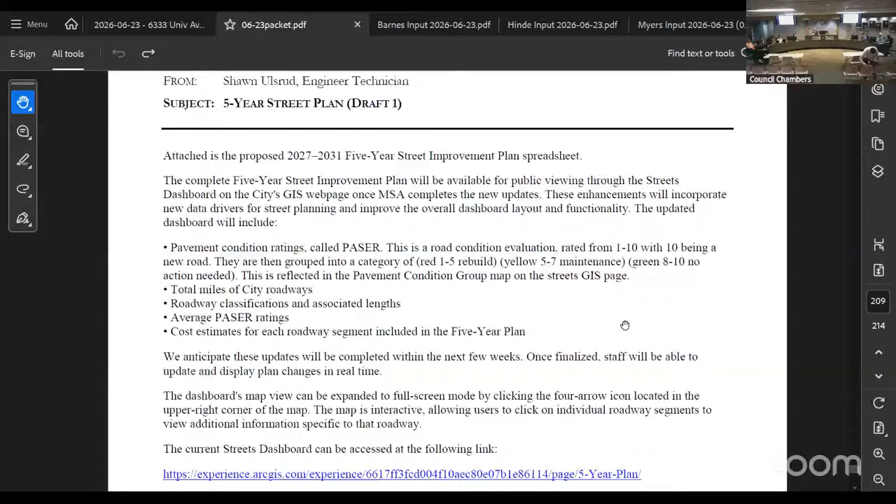And that brings us to our last agenda item, which is a referral from Public Works Committee: consideration, discussion, and possible action on the 5-year street improvement plan. And the recommendation is to approve the 5-year street plan.

Do we want to get a motion? This is Paulson, I'll make a motion to recommend approval of the 5-year street improvement plan. This is Shaw, I'll second that. Thank you, discussion.

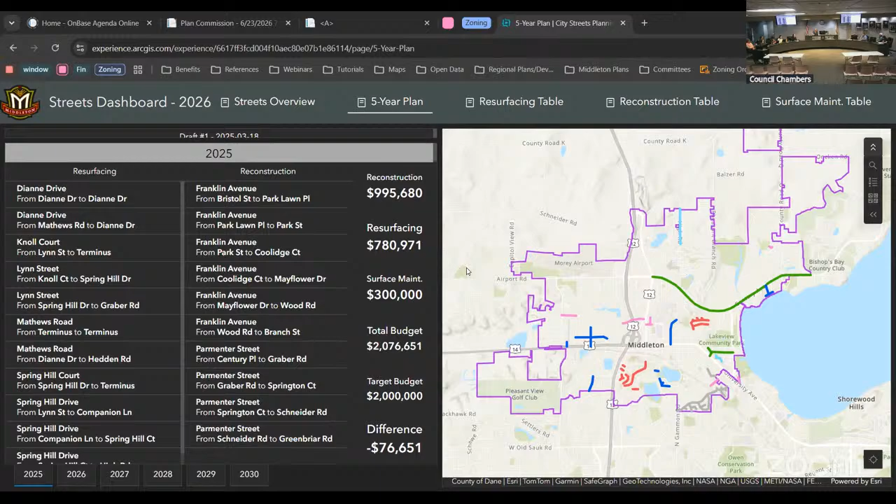Could someone explain what Alder Myers was referring to in his email about the High Road question? I think for us as a plan commission, we're far less concerned about the cost impact, that's for our overlords in city council and the finance department. But as a matter of priority, since we've incorporated High Road now, annexed it into the city, and it needs to be brought up to urban standards, and we have all this development going along, I couldn't imagine demoting the priority of this improvement just because of its cost. Did that make sense? I don't even know if I made sense to myself, but...

Can we bring it up? Oh, there it is. Okay. Yeah, and my own Alder person has indicated to me that the initial cost estimate was higher than expected, the estimate of probable cost, like 4 million, it's like 2 million more. And we collected some amount in impact fees from all the development around that, but probably not enough, just given inflation of road costs.

Well, and I asked specifically about special assessments for the properties that aren't part of the 3 developments that already contributed, and was told we probably wouldn't ask for any funds, so.